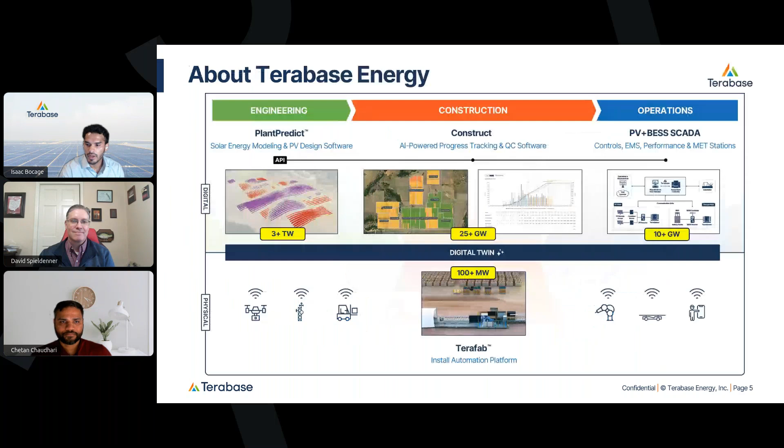For those of you who are new to Terabase, we have multiple product lines, but our overall mission is to reduce the cost and accelerate the deployment of solar through software and automation. First on the left, you see PlantPredict. That's the product that I'm responsible for. It's our solar modeling engine.

And in the middle, we have our construction management software and also our automation platform called Terafab, which is installed in industry-leading 100 megawatts to date. And it's set to install hundreds more in 2026, as we just recently released our version 2 of that hardware, and we're really excited about that.

On the right side, we have our SCADA, plant controls, and performance offerings, which integrate seamlessly into PlantPredict for expected energy. So you can see we have products that cover the entire value chain of a utility scale solar power plant.

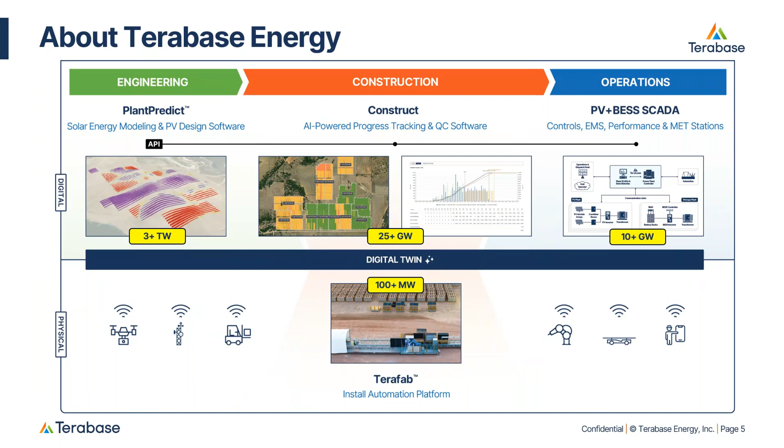Okay, moving on. Now that you know a bit about who we are and what we do, and before we get into the PowerUQ integration, I want to take a couple of minutes to share something bigger that we've been working on for a little while now. We're calling it the Summer of Bankability, and here's what that means.

For 30 years, 3 full decades, there's been one tool that the financing community trusts when it comes to yield assessments for solar projects. One tool that sits behind virtually every energy model submitted to project finance, and that tool is PVsyst. Now, I want to be fair. We owe a lot to PVsyst.

It served the industry well, but its dominance was never really a function of being the best available option. It became the standard before anyone had a credible alternative, and the standard stuck. For 30 years, the financing community had no reason to look elsewhere, and so they didn't.

That changes this summer. This summer, PlantPredict V12 is going to be the tool that the financing community starts to accept and eventually starts to expect. Energy yield models generated by PlantPredict are going to become the bankable standard, and we're confident of that.

We're publishing 3 IE independent validation studies that provide rigorous third-party evidence that V12 can be trusted. We've already had direct conversations with banks and financial institutions, and they've indicated that they're open to accepting PlantPredict generated yield models. The door is open. This is the summer we walk through it.

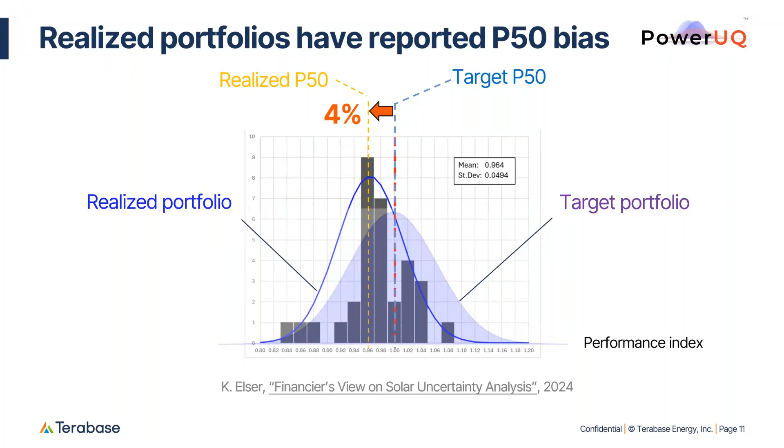So why does this happen? The reality is that weather, equipment performance, and the grid, which are all uncertain in their own ways. So weather is variable, equipment performance has model uncertainty, and the grid is also variable and uncertain, interact over the project's lifetime. And these uncertainties not just interact, but they also compound as years roll by for a project.

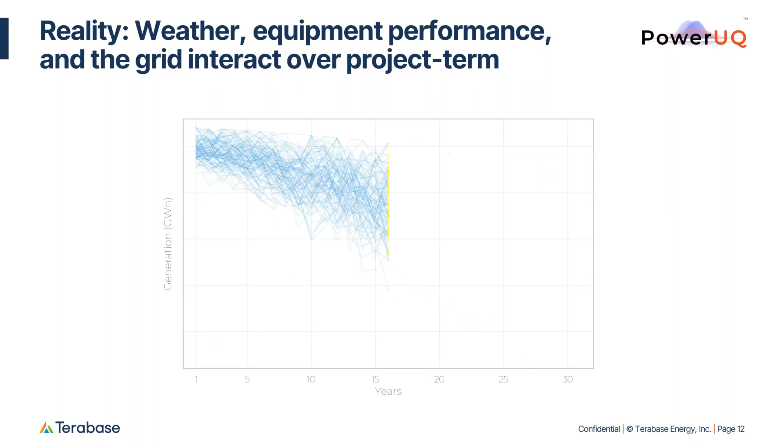That's why we built PowerUQ, a project lifetime uncertainty calculator, suitable not just for the downside cases like P90 and P99, but also to reveal the uncertainty in P50. And now, if that's the first time you've heard that sentence, that P50 has uncertainty, I'm sure you're going to enjoy the demo here in a couple of minutes.

PowerUQ can calculate a credible downside for debt sizing or for project finance functions, just like the poll showed, account for the uncertainty in P50 for a robust generation time series for credible IRR calculations, the profitability of the project, distinguish between the model and weather uncertainties because weather averages out, but the model uncertainty can persist as a bias in your estimates. Enable sensitivity analyses to study which factor is driving the uncertainty in generation.

This is especially useful when you don't know what the exact uncertainty in that input parameter is. Even if you don't know what the uncertainty input should be, you can always study its relative impact on generation to decide if it's worth doing anything about, if it's worth investing dollars into. And finally, it paves the path to hit the holy grail, which is closing the model loop, learning from performance data to tune the performance and uncertainty models. We have a suite of validation results on how this can be done on real projects to show later in this webinar. Next slide.

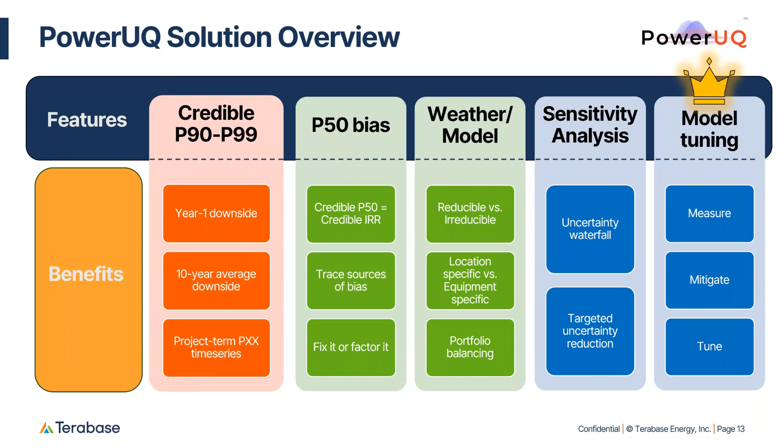So let's take a look at who should care about generation uncertainty. In the greenfield stages of a project, it can help with early stage feasibility analyses, uncover hidden risks, guide uncertainty-aware designs. For example, one of our internal case studies showed that a high DC to AC ratio might be a hedge against uncertainties in early years due to the interaction between clipping and degradation. Project term robust P50 forecasts provide a credible IRR basis that you can use for your financial models.

In mergers and acquisitions, it can help estimate the residual value that's left in the project so you can price it effectively. For project finance functions, the most prominent use case, which I think most of us are aware of, has been used for financial structuring, such as debt sizing, tax equity sizing, but also for conducting studies for parametric insurance, performance guarantees, and sensitivities for IRR to the risk in the particular project. For EPCs, the ultimate test is passing the capacity test or the performance test, and knowing what the uncertainty in the short amount of data that you have can help you plan better in achieving the right outcomes for you.

Asset managers benefit from triaging reality against a credible P50 and also study portfolio effects to see if they're on track, and also help you kind of figure out what projects should be in your portfolio for a long-term steady rate of return. The operations and maintenance functions can use the forecasts for day-ahead forecasts, hourly forecasts, to tune their operating models better based on the uncertainty. With more operating data, you get more accurate. So you can have that rigorous way of doing things in your organization if you are aware of the uncertainty in your estimates.

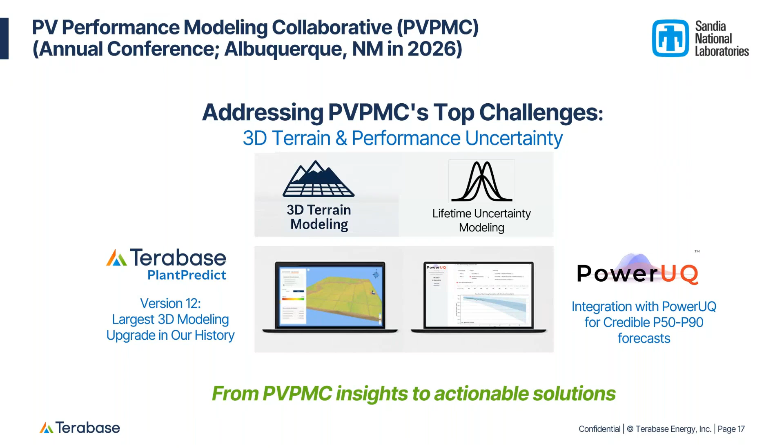So now on to poll question number 4. All right, poll question number 4. So I'm going to launch this now. How do you currently perform uncertainty analysis in your workflow? I'll give you guys some time to answer. All right, I'm going to close this poll. It looks like we have a spreadsheet that came out on top with offload to IEs following behind that.

And I'll go ahead and close that. And let's get ready for the demo. Thanks, Isaac. That was definitely a very interesting poll, that last one. And I really hope that you folks get a chance to see either my talk from ACP or the one that I'm about to give at PVPMC about the shortcomings of using a spreadsheet for uncertainty analysis.

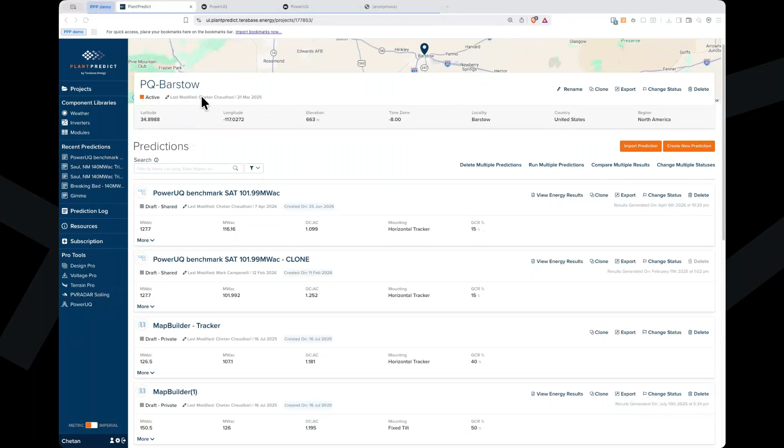So the workflow of PlantPredict and PowerUQ integration really starts in the PlantPredict interface. So folks who are already PlantPredict users will probably find this familiar. I have this one project, PQ Barstow, which is in Barstow, Southern California, with a low weather variability, and I have a bunch of predictions here that I've done to evaluate it in different ways. So I'm gonna specifically look at this benchmark single axis tracker 101 megawatt project.

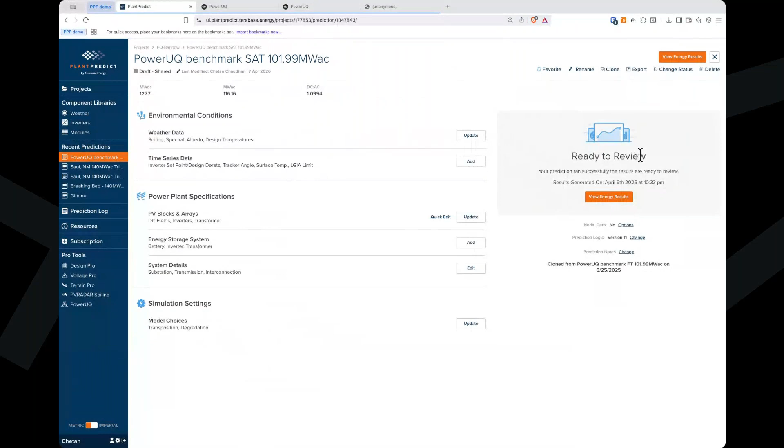And once this prediction is run in the PlantPredict interface, you have access to the energy numbers in PlantPredict. And the next step after that is to go to the PowerUQ interface, where you enter your API credentials and connect to PlantPredict. You get to see all your projects in here. I'm going to select the Barstow project and the specific prediction that we just looked at, and load all the details from PlantPredict, such as the design, the first year energy, and so on and so forth.

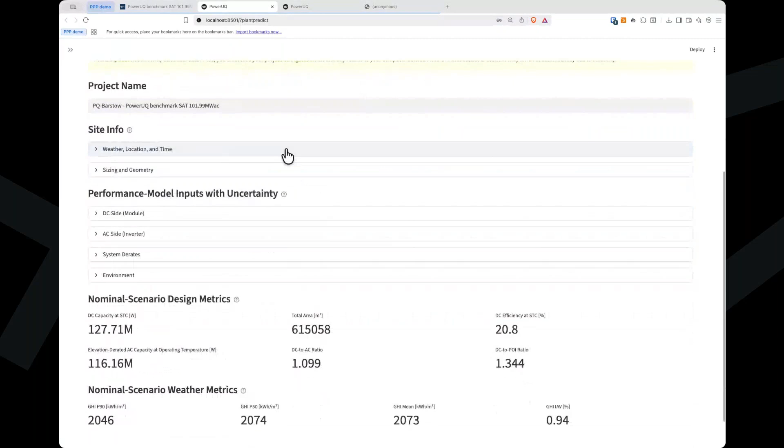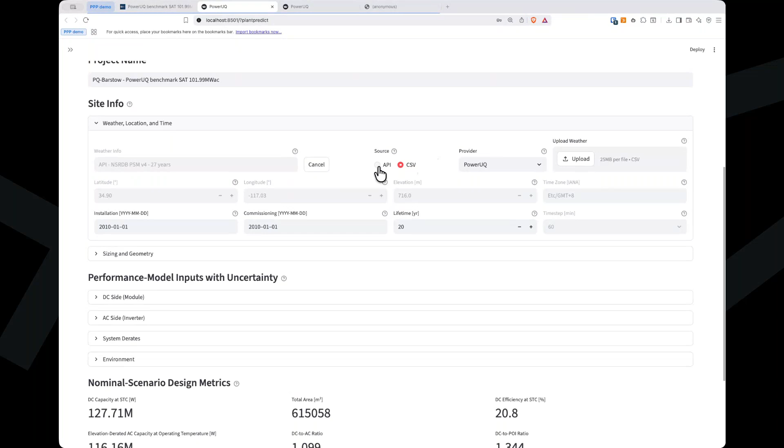In here, our journey really starts with the weather, which is probably the most important part of uncertainty analysis. You have the option of bringing your own weather by uploading a CSV file of time series. You can have 20 years, 30 years, however much data you have, or you can rely on our internal integration with NSRDB to get the historical time series weather.

All the design details, such as the latitude, longitude, and such, the project lifetime, they all come from PlantPredict into PowerUQ. The sizing, which determines the POI capacity, number of modules, axis tilt, azimuth, all of this stuff also comes from PlantPredict into PowerUQ to establish a baseline of design.

The uncertainty inputs start with these sections. So we have uncertainty assumptions that get applied on the nominals on the DC side, the AC side, a few system derates such as availability and curtailment, and the environmental uncertainty, which is GHI and soiling and such.

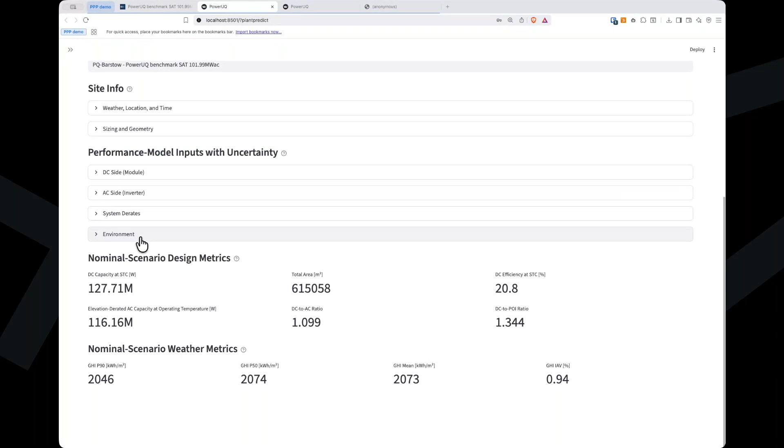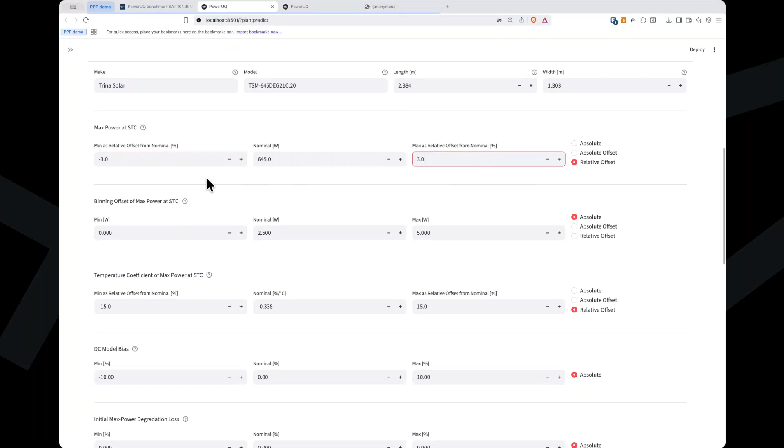So within the DC side, let's take a look at this particular module that we selected. This is the Trina 645 watt module. The nominal value is the most likely value, so this is the one that we get from the data sheets. And I think folks who have worked in the PV industry are familiar with the plus minus 3% measurement uncertainty. So this is the smallest value it could be on the left, and this is the largest value it could be on the right. That's how we capture the bounded uncertainty input for this specific field.

Similarly, we can capture the binning offset that was chosen for your specific site or installation, the temperature coefficient, degradation. Specifically, the degradation has a very specific and high impact on generation. So you can see the values here; the defaults that we provide come from studies from NREL and DNV GL.

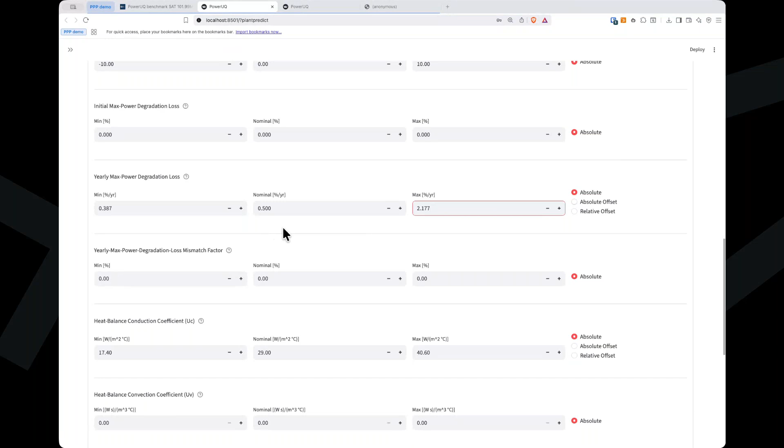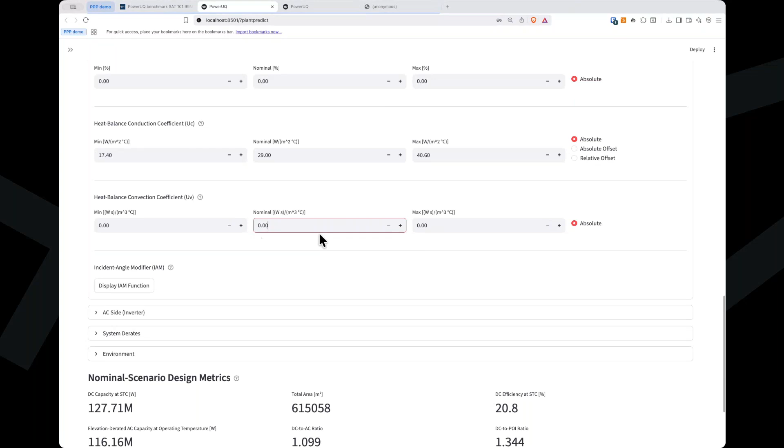Heat balance thermal model coefficients such as UC and UV. The nominal value here came from PlantPredict, where the assumption was made that UC is 29 and UV was 0. There are a few studies that show that from real life data, these numbers may not be 0, especially for UV. So you can test your hypothesis on how much impact this has on the generation outputs as a result of the choices that you make.

The next section has the uncertainty in inverter efficiencies. Then we have uncertainties in system derates such as availability loss. Just for simplification, I've zeroed them out, but you can enter values from your own portfolio for the first year and the rest of the project life. We've made it asymmetric like that because typically the first year demonstrates a higher availability loss due to infant mortality of components and such. And then for the rest of the project lifetime, you have a similar availability loss assumption with uncertainty in it.

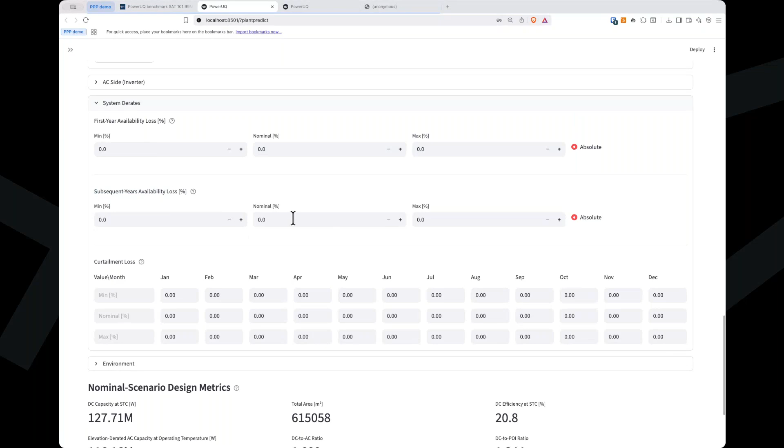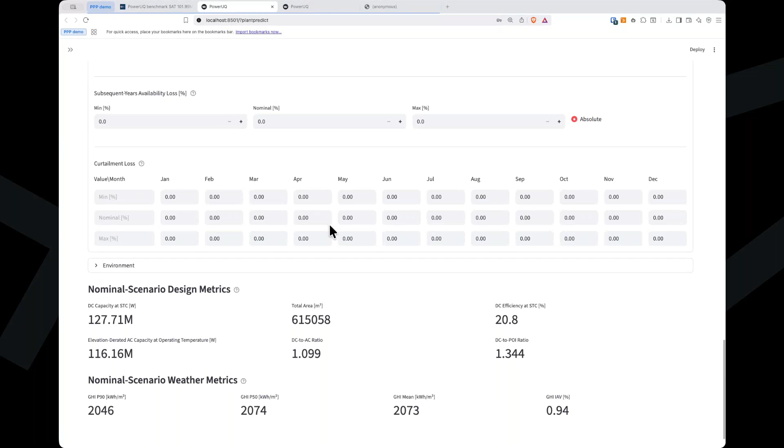For curtailment, again, I've zeroed it out for simplification, but you can gather the monthly values with uncertainty in them. We've done a study on CAISO because this particular project was in CAISO, and the historical uncertainty in the curtailment was about 5%, but the net effect of that on the outputs, as a result of its interaction with the rest of the uncertain inputs, ended up creating a 10% systematic bias in the P50. So it's definitely something worth considering if you are not already considering it in your simulations.

In the environmental section, we have uncertainties in GHI, so that's irradiance, and folks might be familiar with the met station campaigns and how we can use them to reduce the bias in this particular assumption. It's important to note that only the bias can be tuned. The uncertainty in that bias still might be there. So as a result of your MCP tuning, you can actually study the effect of how much that uncertainty in GHI also reduces with PowerUQ.

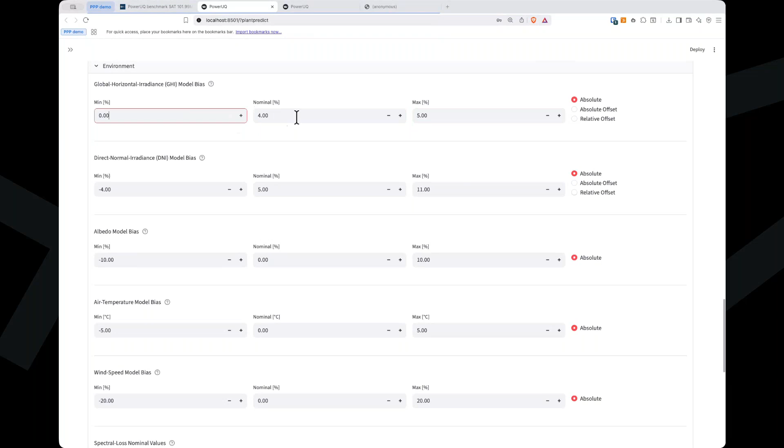There are a few other inputs that I'm not gonna spend a lot of time on, but one important one would be soiling. You can get your monthly soiling losses along with the soiling loss uncertainty and soiling loss model uncertainty.

Finally, we have a quick summary of what design was captured from PlantPredict. So we have the DC and AC capacities, the DC-AC ratio, DC to POI ratio, and the specific weather that was chosen for running these simulations, and some metrics that point towards the mean and spread of that weather. So this is the interannual variability of GHI, 0.94%. Being in SoCal, it's very low, as you would expect.

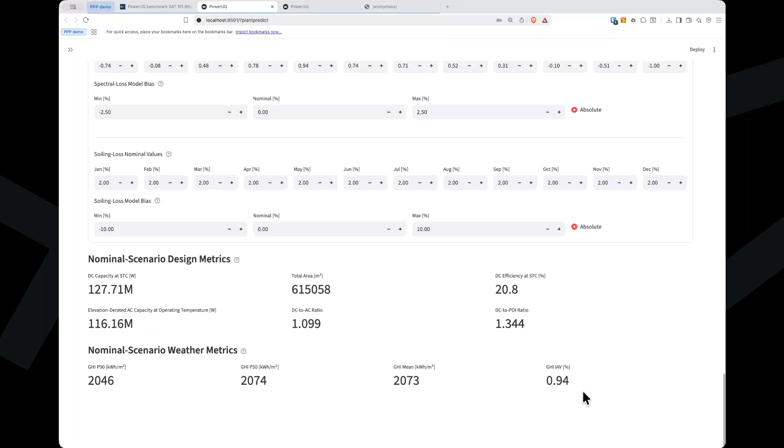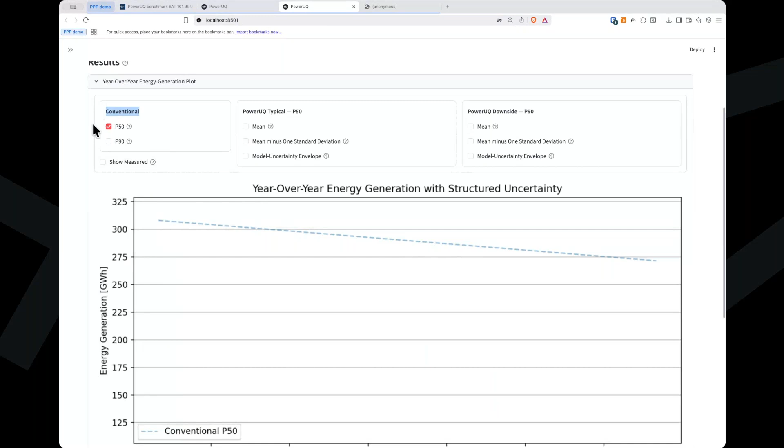The next step is to hit simulate here. To save time, I'm gonna just go to one that I have already done. Here, our journey really starts with the conventional way of looking at a P50. And this might be a line that many of us are familiar with. This is how the pro formas in the industry currently look. You take your first year energy and then degrade it over the project's lifetime with your choice of degradation coefficient. And you do the same for the P90.

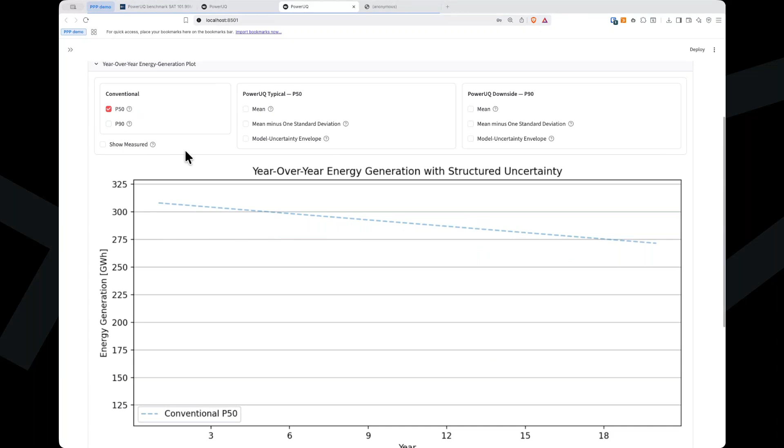You take a haircut doing root sum squares of uncertainties, and the P90 from the first year gets degraded over the project's lifetime. The insight that PowerUQ provides here is that P50 is uncertain. And you can see the cone of uncertainties, as a result of all the uncertain inputs that we just looked at, evolve as the project years roll by. So in the earlier years, you have lesser uncertainty, and in the later years, you can start seeing how the uncertainty impact increases.

We give a few metrics to compare these. The first one being just the mean uncertainty. So this is the case that gives you the mean P50.

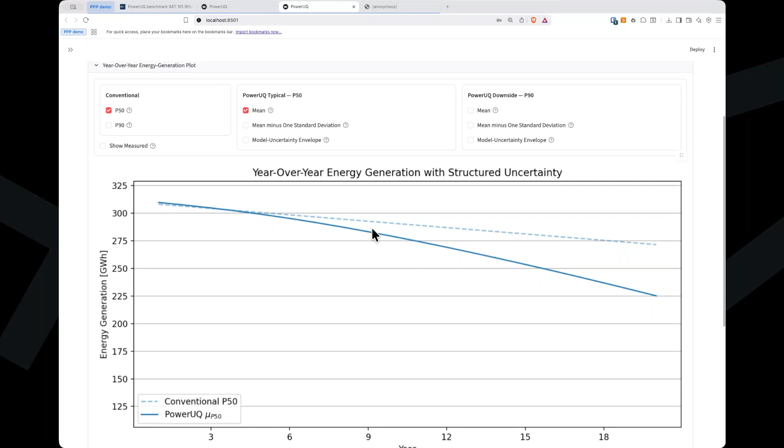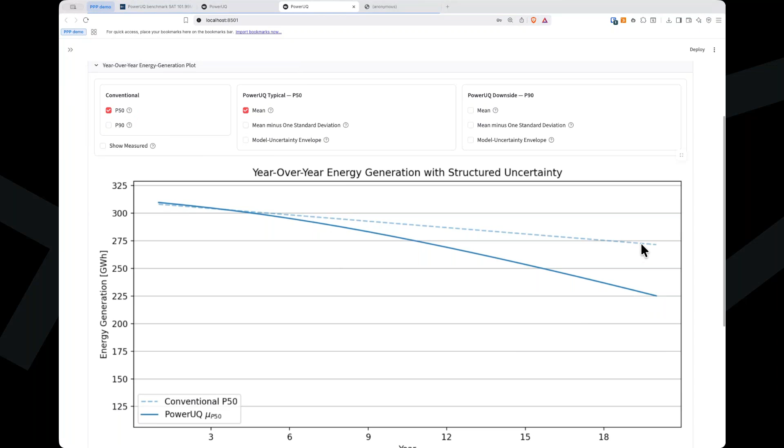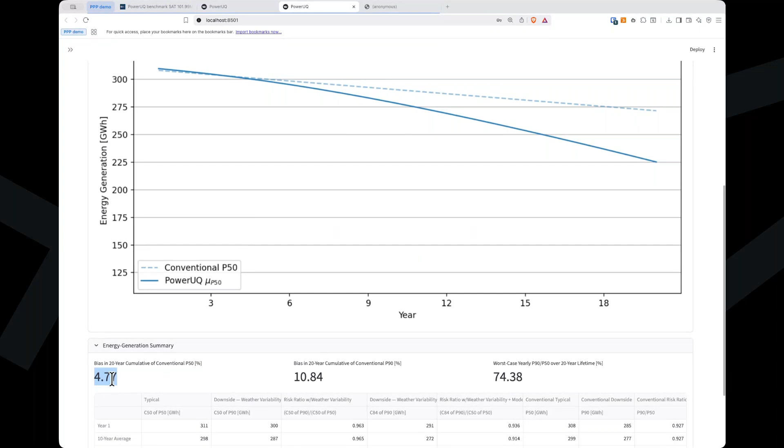What we really mean by that is the P50 is uncertain, and we're giving you the mean metric of that uncertainty. And this triangle here that's formed as a result of the conventional assumption about P50 and the mean PowerUQ P50 is really the P50 bias in your specific project compared to how things have been done. We also give you a calculation of that for ease so that you can iterate over your design assumptions and uncertainty assumptions. In this particular case, it was about 4.7%, 4.5%, 5% for this particular location.

Moving on to the downside cases. So the P90, as we saw, is derived from P50 for the conventional methods. But for PowerUQ, there is an uncertainty envelope of its own. So P90 has its own uncertainty envelope as a result of the downside calculations. And we give you two metrics. So the first one being the mean of this uncertainty cone, which gives you the weather downside. So this is assuming that the model uncertainty had no impact or it was average.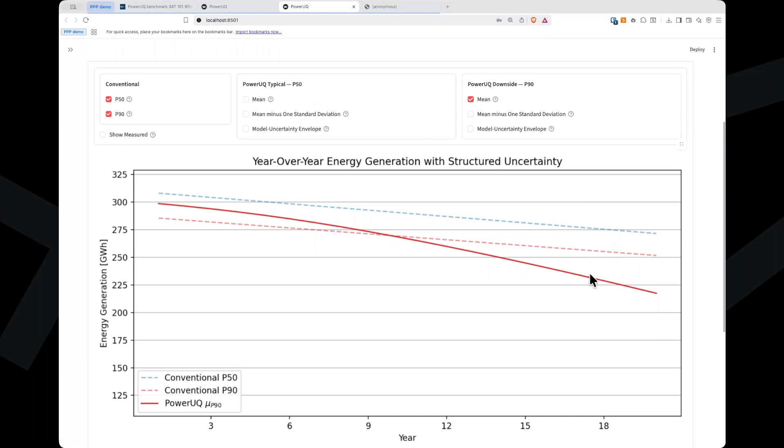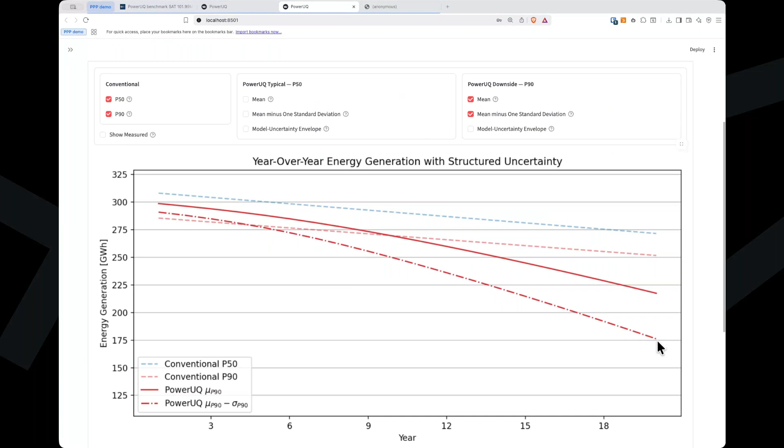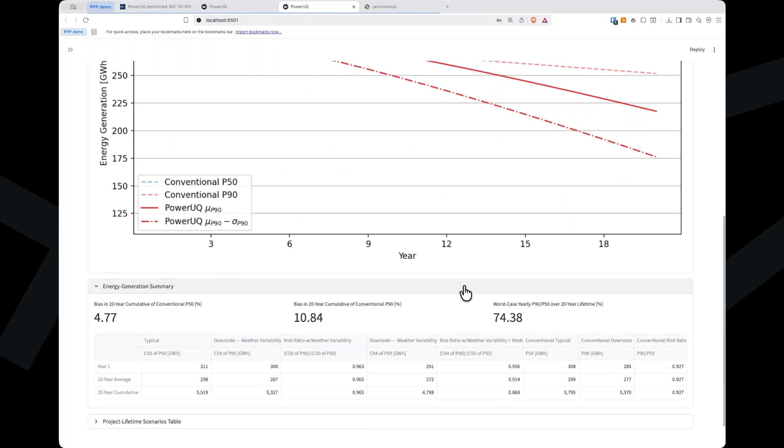And this is the mean minus one standard deviation, giving you a more conservative estimate of downside. And this is something that's more equivalent to how things have been done in the root sum squares method for uncertainty calculation. Using that, you'll see that the worst case annual P90 to P50 ratio, the risk ratio, is calculated here in the energy summary metrics. That's something that you can use for debt sizing purposes. We also give you the time series of all of these calculations here in a table that you can post-process for financial modeling or such.

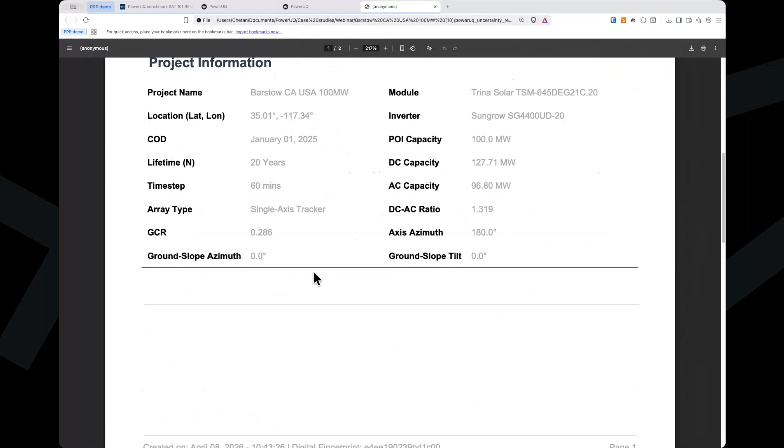The next step here is to download all of these. So we provide you a configuration file that you can use to recreate these results, a table of all the P50 and P90 results, and also an uncertainty report that I'm gonna share now. The uncertainty report starts with a traceable, digital fingerprinted report with timestamps and such, so you can use it for auditing purposes.

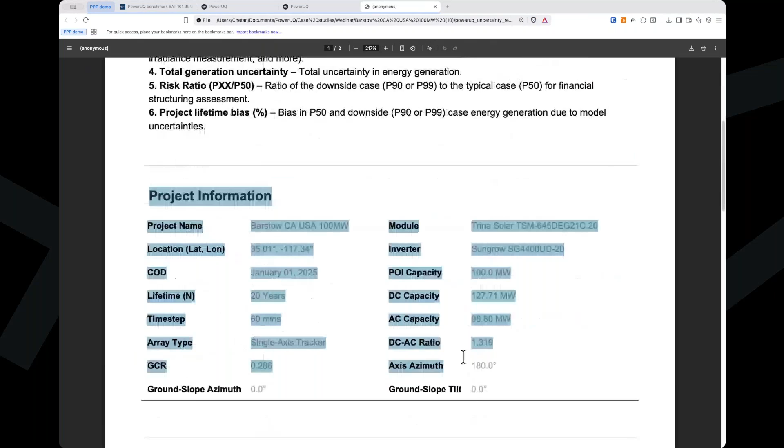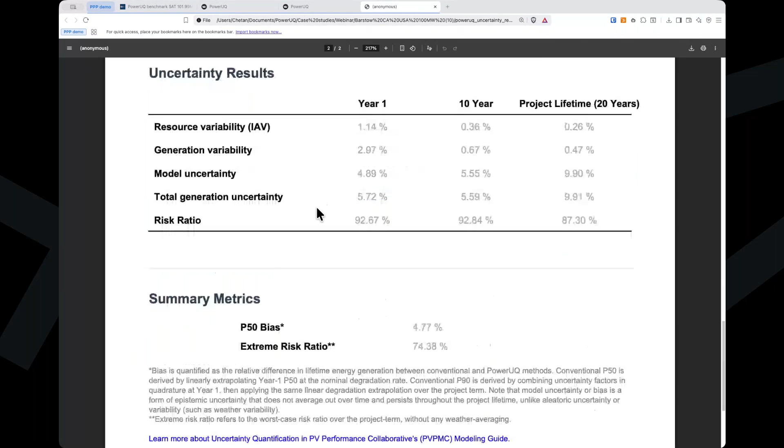It starts with definitions of the metrics that are provided as a result of these analyses, a little bit of context information about the project itself, what the metadata is for that specific project, the assumptions about the design, and finally, the metrics of interest. So the first part being the weather metrics that give you a quick glimpse of what kind of weather was used here. So this was what was the source of the weather, what was the P50 of the weather, what was the spread in the weather, the interannual variability, and finally, a table that gives you a summary of all the uncertainties that were calculated as a result of the PowerUQ analysis.

Starting at the beginning of the model chain, the resource variability. So this is where the weather impact starts. And you can see in year one it's about 1.14%. As a result of this resource variability, you get variability in generation. That's a little higher than that. It's about 3%. The effect of all the model uncertainties together is about 4.8% here. And the net or total generation uncertainty as a result of both the generation variability and the model uncertainty is about 5.7%.

Another metric of interest for folks usually is the 10-year average, just to get a quick glance at how much the project risk is. You can see that the resource variability averages out. So it goes from 1.14% to 0.36% over a 10 year period. So does the generation variability, from 3% to 0.6%. But the important thing to note here is the model uncertainty actually goes up a little bit. And this is because the degradation and mismatch loss due to degradation increases as time goes by. And that's why you see an increase in this particular parameter.

So as a result, the net combination of the variability and model uncertainty gives you slightly lower than this first year uncertainty, but it's still pretty high as compared to what the conventional methods would have yielded. The summary metrics provide you the P50 bias as we calculated, as we saw in the plots, the 4.7% for this particular project, and the extreme risk ratio. So this is the highest extreme downside case for that project. So if you are really trying to do the debt sizing for the project, this would be a number that you would consider to know how much risk that particular project is carrying from a generation perspective.

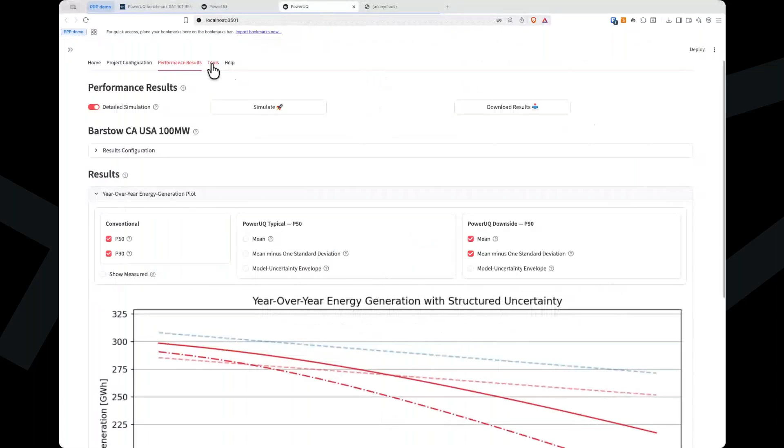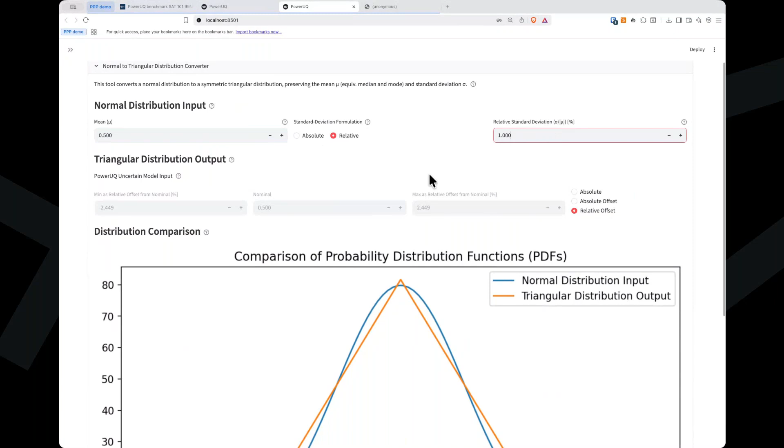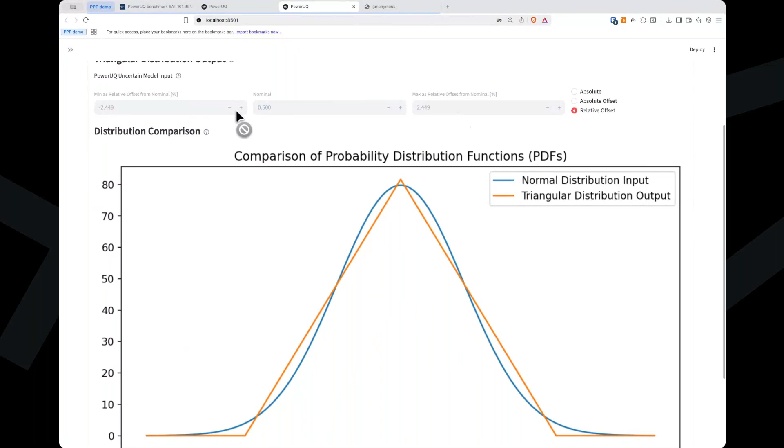Going back to the tool here real quick, we understand that some of these are new ways of doing things for the industry. So we've provided some tools to build a bridge to the conventional method. So the first one is for the inputs. This gives you a bridge to convert your normal standard deviation sort of inputs into the PowerUQ inputs because we use bounded triangular inputs. So here, let's say I assume that the degradation had 0.5% nominal value and 1% relative standard deviation. So that kind of preserves the probability density of these two distributions and gives you the PowerUQ inputs to use, which come out to 0.5% nominal with plus minus 2.5% as the min and the max to be used in PowerUQ.

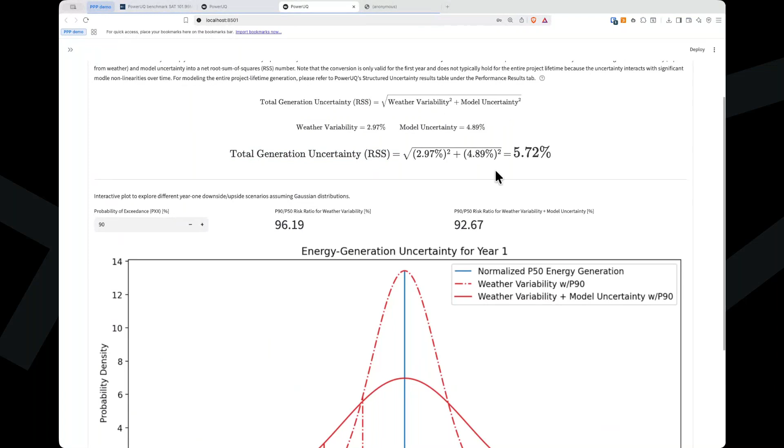The second tool that we have provided here is the calculation of total generation uncertainty, which we saw in the report as well, as a combination of weather variability and model uncertainty as we calculated. And you can interact with this tool to calculate your P90 to P50 risk ratio for both the weather downside and the weather plus model downside in here. So here I'm showing the P90, but I can easily change this to P99 and see how that risk ratio gets more aggressive as we change those inputs.

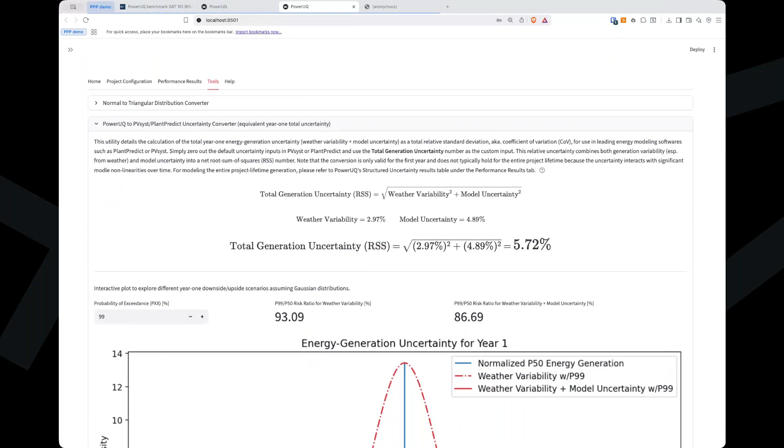What would you desire the most from an uncertainty analysis tool? All the answers come in. I see they're coming in now. Give you guys a few more seconds. All right, I'll end the poll and share the results. It's like measured data comparison for model validation / tuning would be coming out in the lead there.

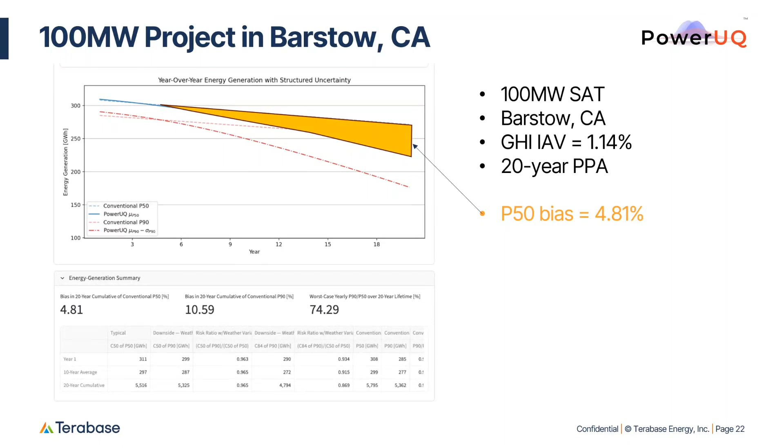This is the same project that we looked at in our demo. What I'm going to do now is share the estimated financial impact. This is a 100 megawatt project, single axis tracker in SoCal, where the lifetime P50 generation bias, as we calculated, was about 5%. Next slide. The simple assumptions that we made here for assessing the financial impact is a 20-year PPA with standard assumptions about 70% debt and so on and so forth. And to compare all these scenarios, we kept everything the same. So the PPA rate is the same. I know that in real life that's not going to be the case, but we wanted the same stage to compare apples to apples.

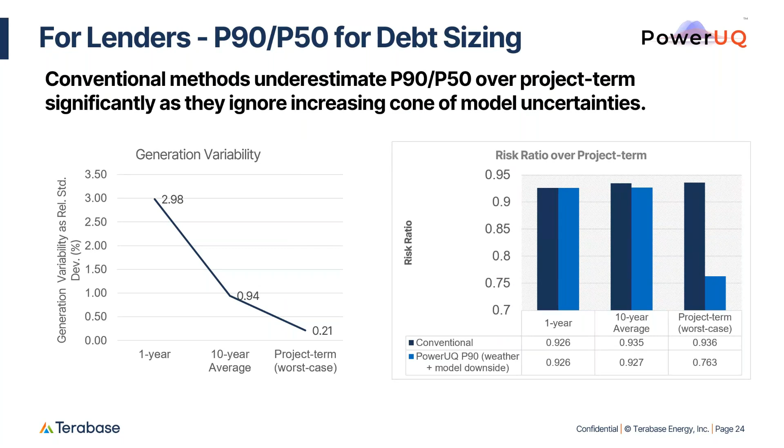So what does that mean for a real project, right? All of the stuff that we've been talking about so far was theoretical. These were case studies of hypothetical projects. We went ahead and started applying PowerUQ to real projects. So let's take a look at one of the projects that we applied PowerUQ on. This is a 3 or 4 megawatt project in Pennsylvania. So Pennsylvania, hence it is higher IAV, about 3.8%.

The green line here in this plot, which was not there during the demo, is the measurement. So this is the actual measured generation as it happened over the 16 years. We just had some basic design inputs available to us to capture it in PowerUQ and run simulations. So as a result, we assume that our model was highly uncertain, and that is something that we can do in PowerUQ. If you do not have a very precise, high-fidelity model available, then you can just assume that your model has higher uncertainty to account for that.

The results show that PowerUQ was able to tune the actual P50 here. So you're seeing about 8 out of 16 years with PowerUQ. And the conventional methods only pick 1 out of the 16 years in this particular case, as it was captured in the details that were available to us. Similarly for P90, about 14 out of 16 years for PowerUQ, which is roughly 90%, and 9 out of 16 for P90, which is again not quite the textbook definition of P90.

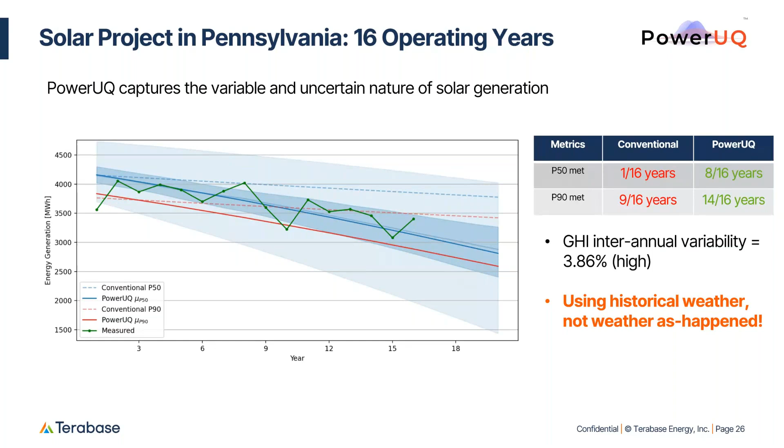One very important point that I want to stress here is that PowerUQ is using only the historical weather. This is not a weather-adjusted tuning. I mean, you can say that we are playing this game without any cheat codes. Next slide.

Before I move on to the grand finale of validation, I want to define our validation metric because it differs slightly from the industry convention. And we had to do that because, again, we are using historical weather and not weather as happened. So the performance index star, or PI star, is essentially measured over expected, except that the expected value here is not using the weather as happened, but the historical weather. So this is us putting ourselves at the start line of a project, just like you would be while you're building a new greenfield project. Next slide.

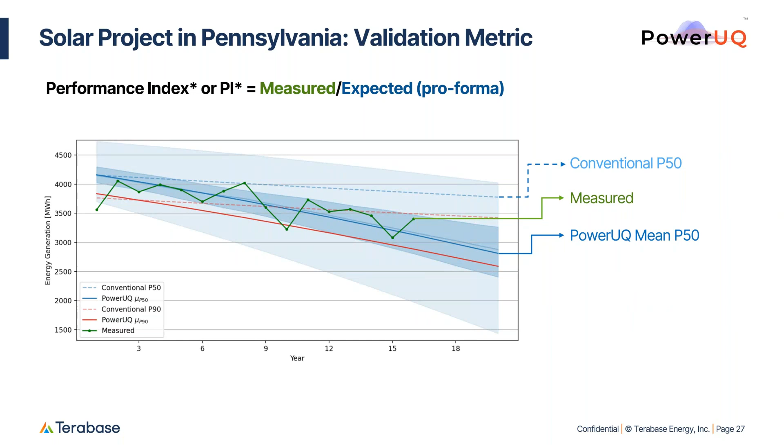So comparing the performance index as calculated using the conventional method and the PowerUQ method. Here, over the project's lifetime, we see about 7% P50 bias or 7% over prediction on average. And you can see that it increases over time. This is due to the compounding model uncertainties as the years roll by. Next slide, please.

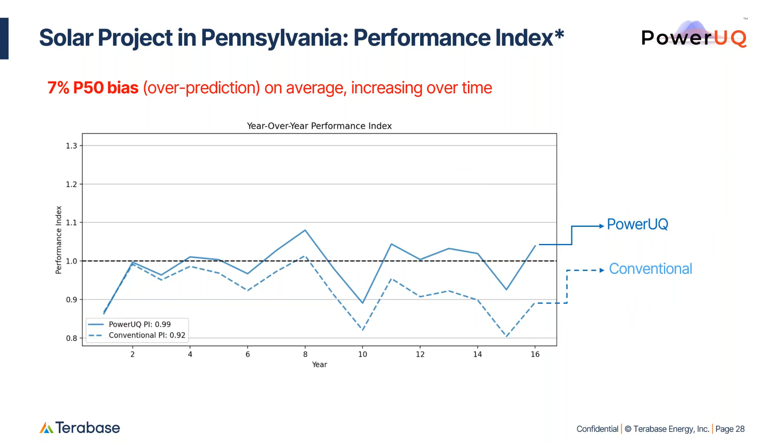So the next step was naturally to expand this validation to more projects. We looked at about 6 projects across the US in varying climates: California, Colorado, Pennsylvania, New Jersey. In total, 67 project years. And because we are doing comparison using performance index, you can assume that every year is independent in the comparisons.

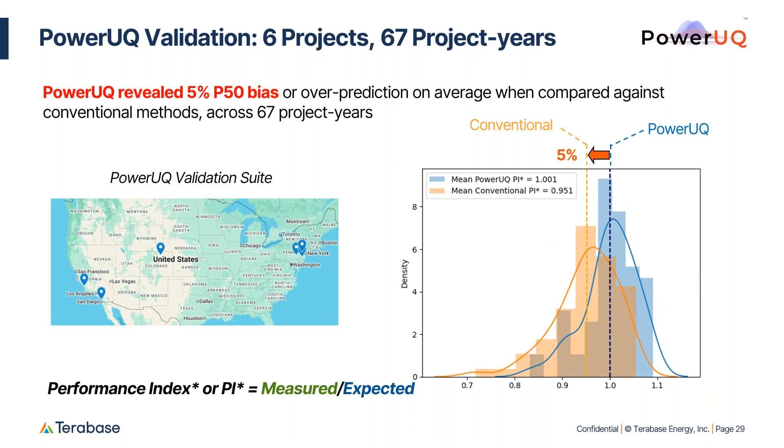The distributions on the right here show the spread of the project year performance index for both the conventional method, which is the orange distribution here, and the PowerUQ distribution, which is in blue. While the PowerUQ distribution in blue is centered around 1, the conventional is on average 5% lower, revealing the P50 bias of about 5%. We are going to present a deeper dive into this at PVPMC later this year, so we are really hoping to see you there. Next slide.

So who are we? Who is PowerUQ? I am Chetan. I have been in renewables for over 18 years now, building data science products at companies such as SunPower, dealing with the realities of messy performance data. Mark, our CTO and co-founder, brings a deep uncertainty research background with postdocs at NREL and NIST, specifically on uncertainty in PV module measurements, and is probably one of the best software engineers in the industry.

We are also working with the PVPMC community on an uncertainty quantification guide. If you would like to contribute, please ping me. I'm happy to add you to the mix. Would appreciate your inputs. Next slide.

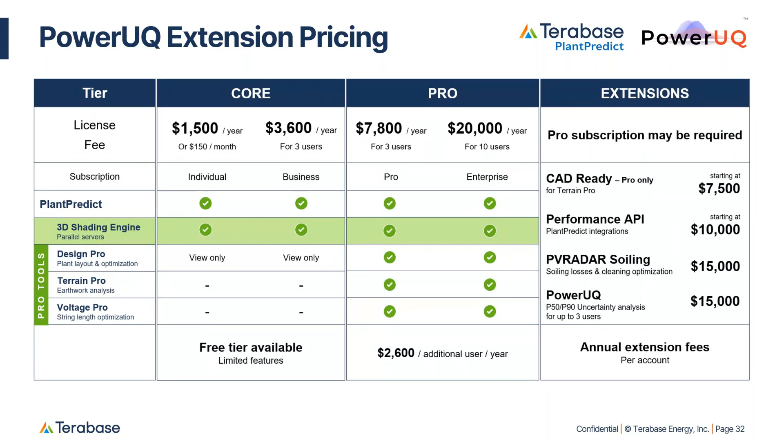All right. Before we wrap up, I want to mention one more thing. We're offering a small number of early adopter spots for PowerUQ integration at a significantly reduced subscription price. If that's something that interests you, now is the time to raise your hand. In exchange, we ask for 3 things: participation in a joint case study, a testimonial, and some data sharing to help us validate and improve the product. We make that process as straightforward as possible, and it's not really a heavy lift. What you get in return is meaningful.

You get substantial savings on your PowerUQ subscription, full access to the integrated workflow that you've seen today, a direct line into how this product evolves, and a genuine first mover advantage of having a bankable energy model built on PlantPredict and uncertainty quantified in this revolutionary way while the rest of the industry is still catching up. These spots are limited and they will fill up. Mention your interest in the chat now or say something in the post-webinar survey or reach out directly over the next few weeks. We'd love to talk through what participation looks like for your organization. And we expect these spots to fill up probably by early summer, if not by PVPMC. So you really got to move quick on this.

All right. And that is the end of our presentation. We are now going to move on into Q&A. So Isaac, if you would like, go ahead and serve up the first question.

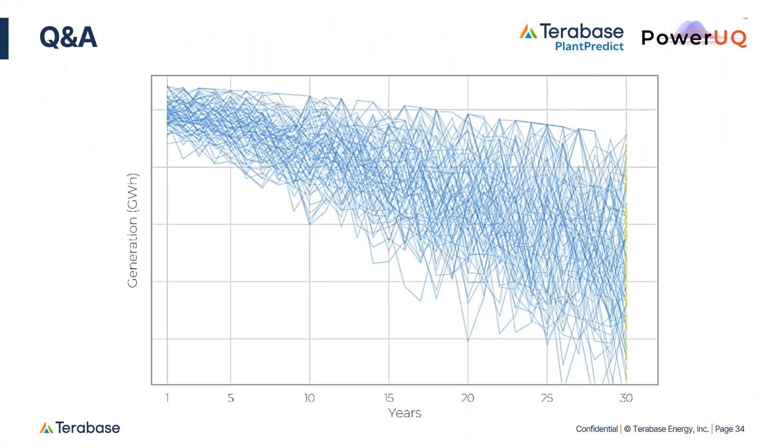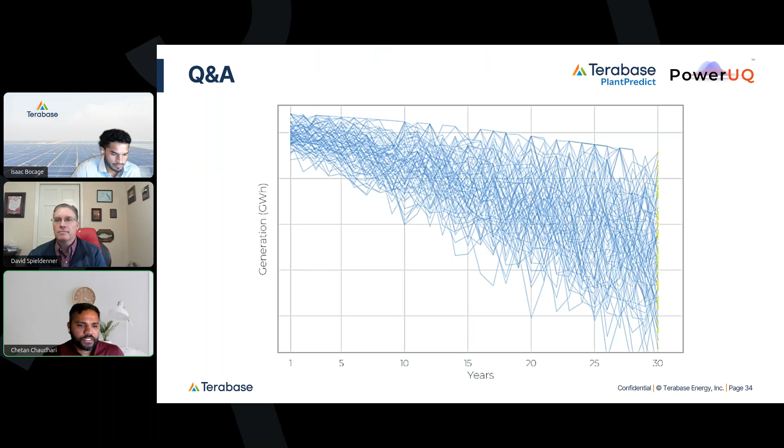All right. And for our next question, in your P90 models, what satellite databases do you use as primary sources? And what track record or performance history do those sources have? Additionally, do you work directly with Solar GIS or any other similar solar irradiation data provider? Yeah, that's a great question. Currently, we are using NSRDB, and as far as my knowledge goes, all the weather providers use similar satellite databases underlying. We have the ability to upload any historical weather from any weather provider, so Solar GIS, Solar Anywhere, so on and so forth. And we have had conversations with all of them to get to a tighter integration. So stay tuned on some of those details. Thanks.

Okay, and for our next question, which parameters do you find introduce the most uncertainty in P50 bias? It feels like the P50 bias is really, really sensitive to two things. First is degradation uncertainty. And the second one is the irradiance, the GHI. There have obviously been efforts in the industry to tune the uncertainty in these two by doing met station campaigns and the vast campaigns of degradation studies that NREL and DNV GL have undertaken. So if you get those two right, then you probably win half of the battle right there.